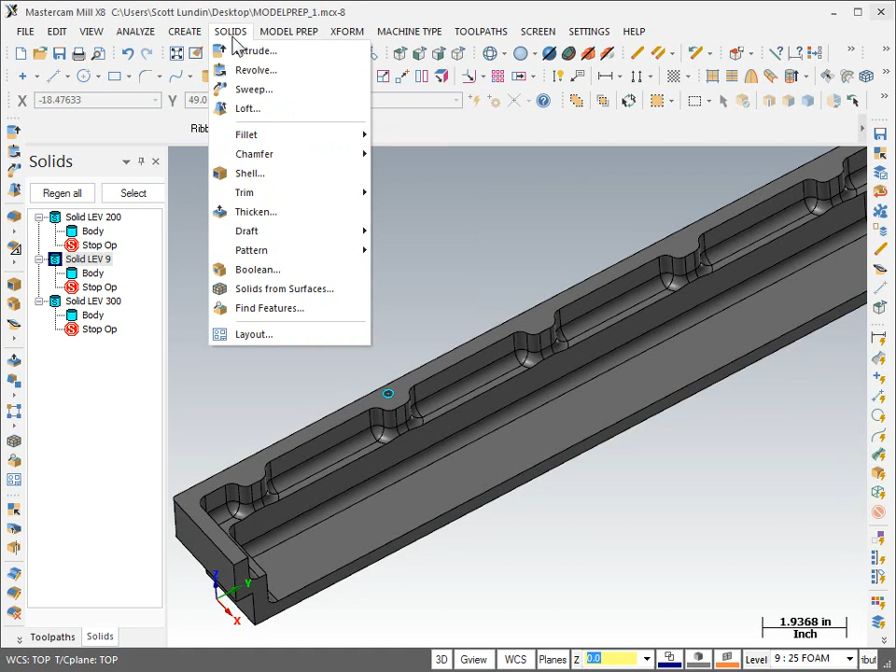This part came in and the customer basically wanted to move this circle and this boss with all the radius over an inch or whatever distance. I'm going to show you how to do that. I've created a few different levels: his original part is on level 9, and I made copies onto level 200 and 300 because I'm going to show you a couple different strategies. The first one on level 200 will probably fail, and then I'll show you how to get it to work on level 300.

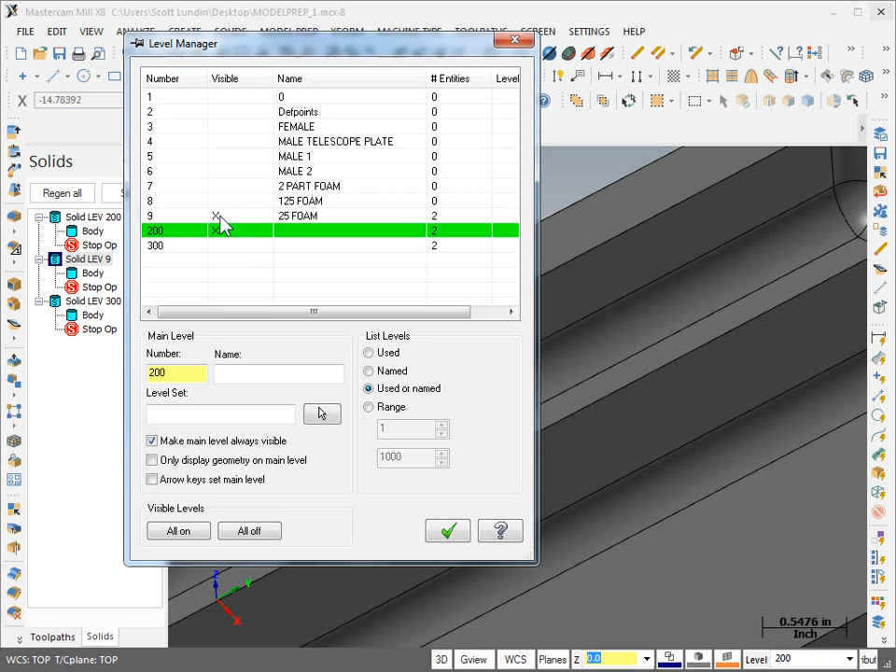So I'm going to make 200 the main level and turn off level 9. We'll OK that. What we need to do is get this boss separated from this top face. In a perfect world that's all we'd have to do, and we could move the boss and the hole together. But it may not work so easy on this part because we've got some funny radiuses going on down here.

At any rate, I'm going to draw some helper geometry—a line from this corner to this corner. You notice as I touch that face, that's one face, the skinny part and the boss. We need to split that.

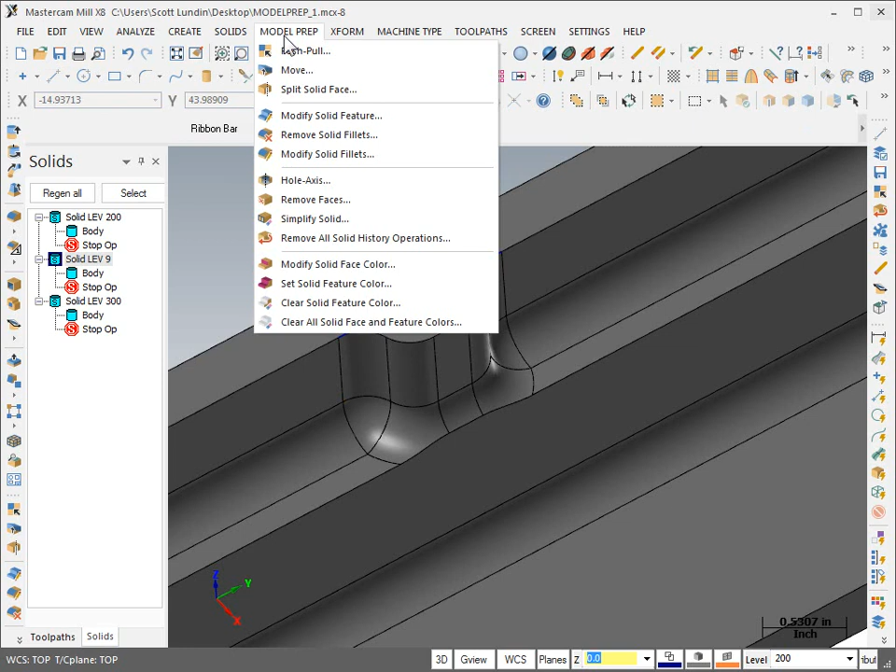So that's where we go up to Model Prep and use Split Solid Face. It asks you to pick a face and some geometry, so I pick this face, and to pick that blue line it won't let me right now. I have to go up to the main menu and turn off the face button, since those solid selection icons aren't on right now. Now I can pick this edge, and that's it—it's split.

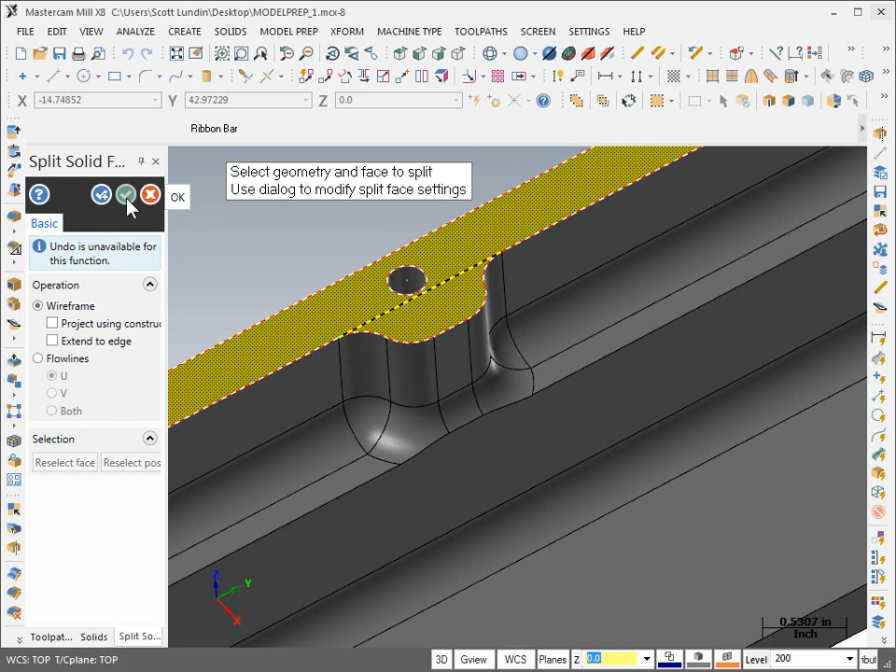We hit OK here, and you notice I touch that—that's one face going straight across, and this is a separate face. So technically now this boss is separated from that face.

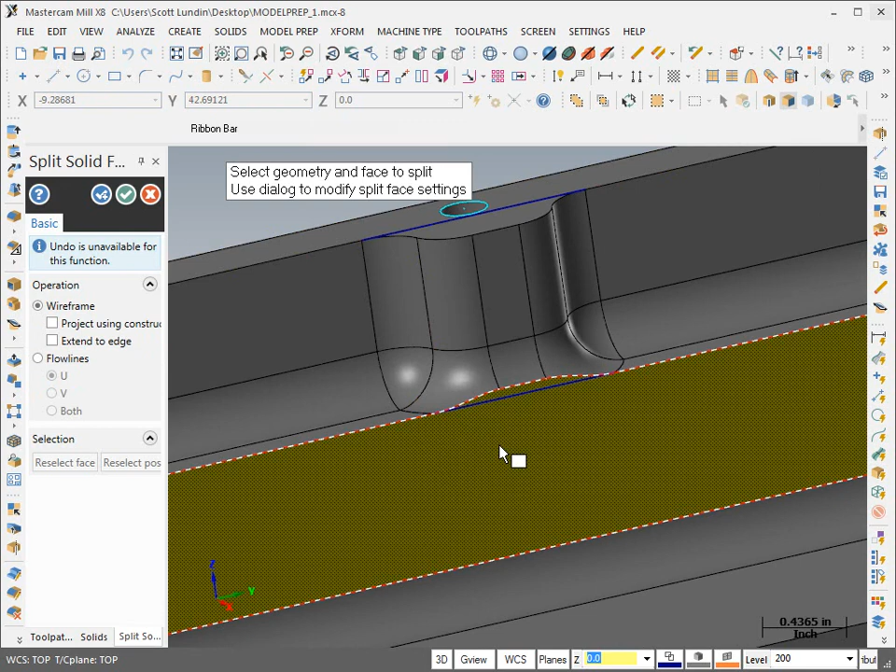Now there may also be one down here that we have to separate. So I'll draw another line from here to here, and do the Model Prep Split Solid Face again—this face, turn off the face button, this edge, OK. As I zoom in now, there's one little tiny face that's different. They are separated now, so the boss, all the way around, is separated.

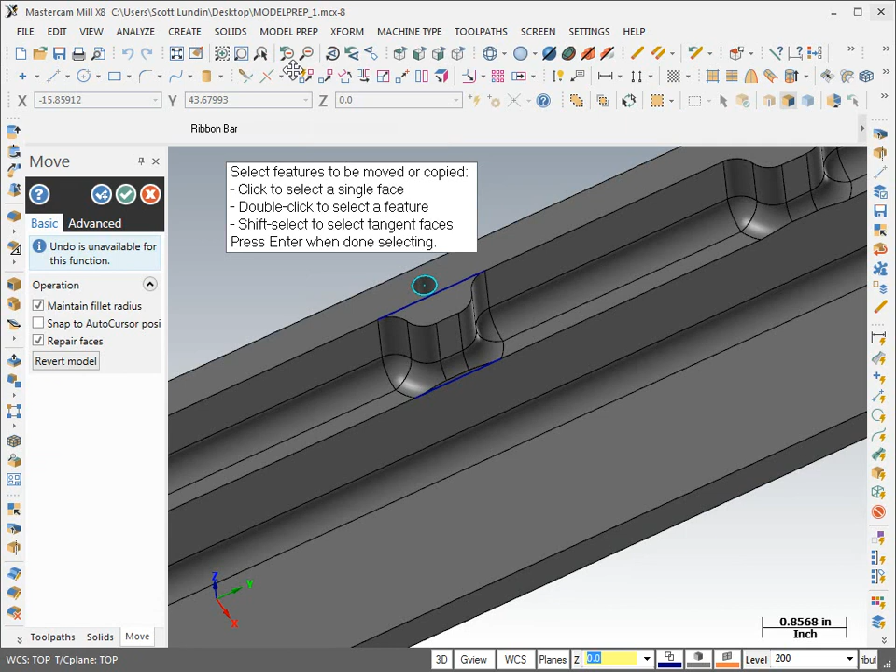So now perhaps we can move it. One way to do that would have been with Model Prep, Move. It tells you to pick your surfaces, or faces I should say, and then hit Enter.

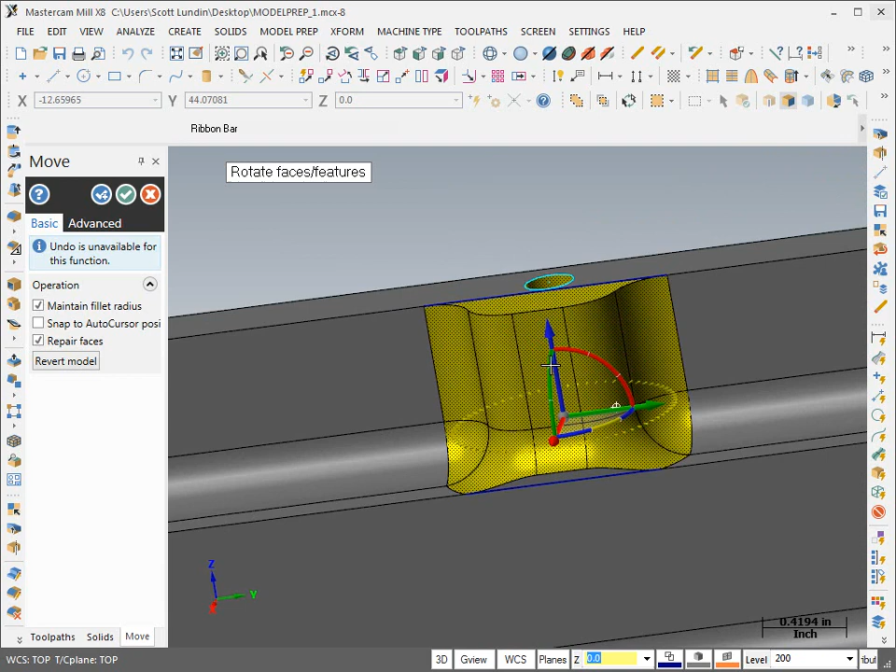I'm going to pick the cylindrical bore, and also this top face and all of these faces—careful not to click on the clock dial yet. It looks like I got all those faces picked, and probably also this one, because I want to take all of that and move it over.

Now right here is this little icon, the symbol for moving geometry. If you click on it, that's the symbol for just moving the axis indicator only. I do want to move the geometry, so I click on that.

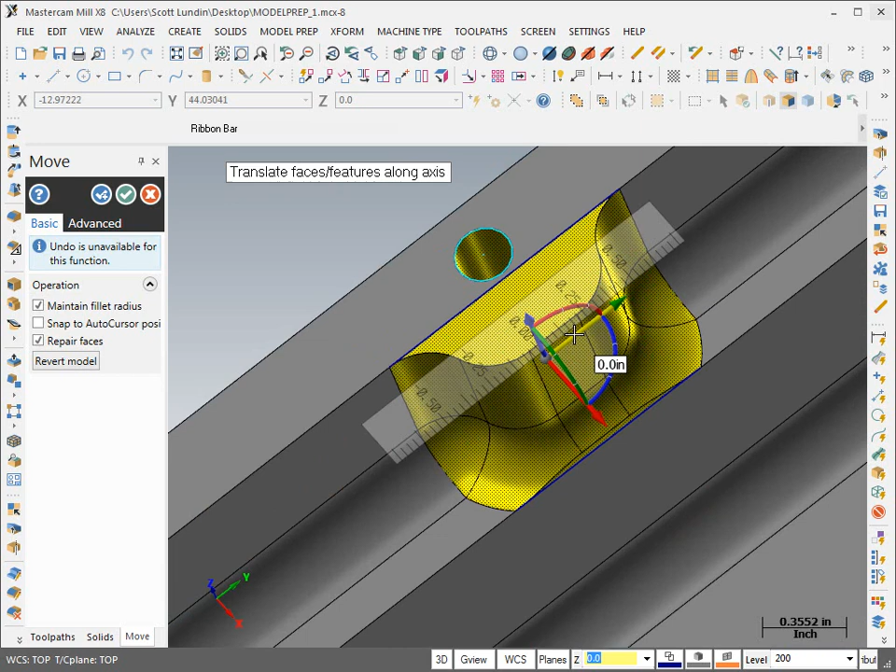To move the geometry, all I have to do is click on the green stem and put my mouse into the face. You can see as I'm moving, the hole is moving but the boss is not. I'll take it up here to 1 inch. So the hole moved, but the boss didn't.

So in a perfect world that would have been the way to do that, but since that's not going to work, I'll do it a little bit differently. To start fresh and clean, I'm going to forget about level 200 and go to 300, and turn off 200.

So, doing this a little bit differently—first of all, it's these radiuses that are probably causing the issue of it not being able to move. I'm going to need to delete these radiuses, then I can move the boss, and then I'll have to rebuild the radiuses. So first I need to know how big these internal radii are.

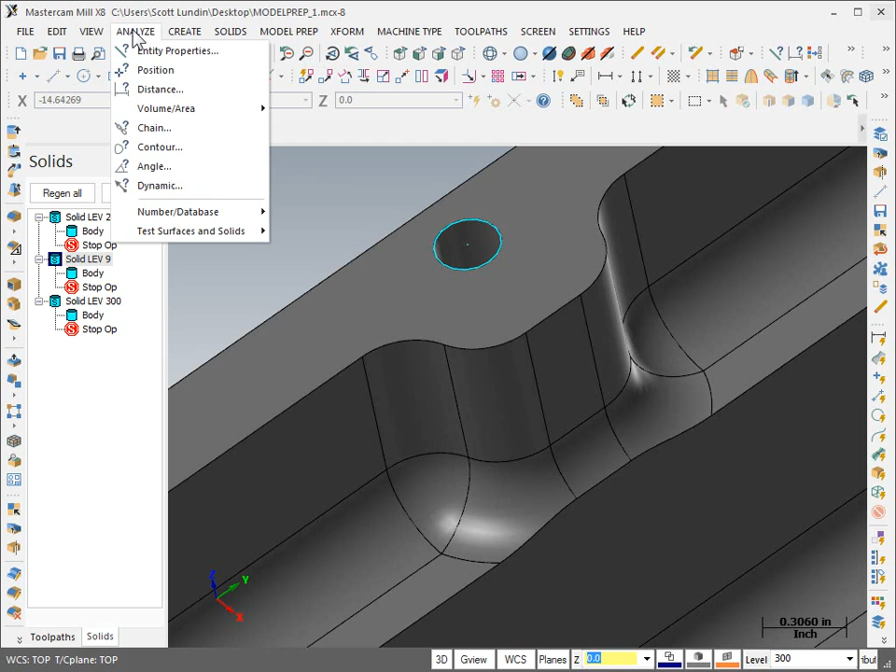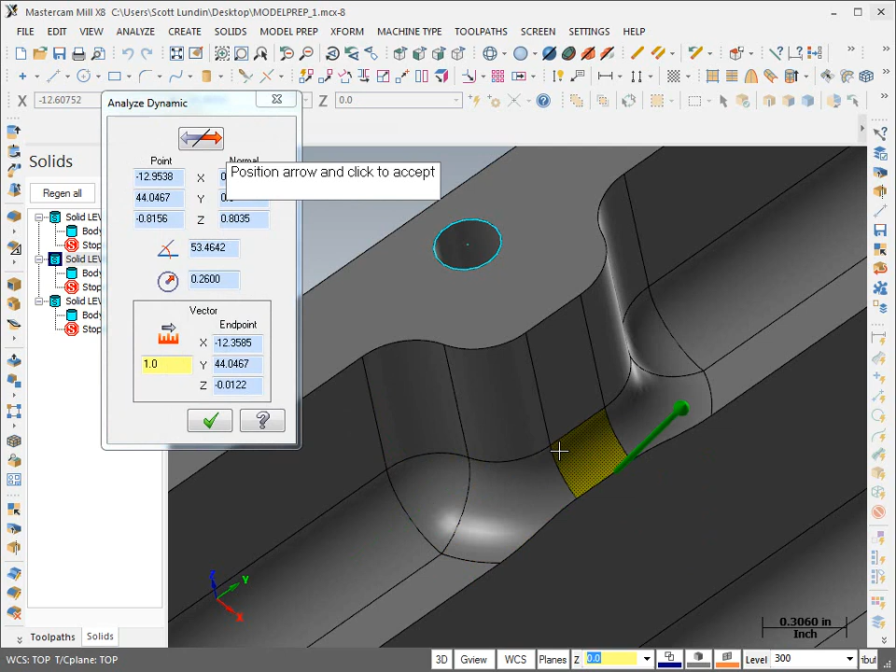I'll go up to Analyze Dynamic and click on this face here, pulling the box over so you can see—that radius is 260. Clicking on this face twice, as I move it around, again you can see that's a 260 radius. Clicking on this one, 260, and another 260—so these are all 260.

Another 260 and another 260. Okay, so just keep that number in your mind. We're going to need to know that later.

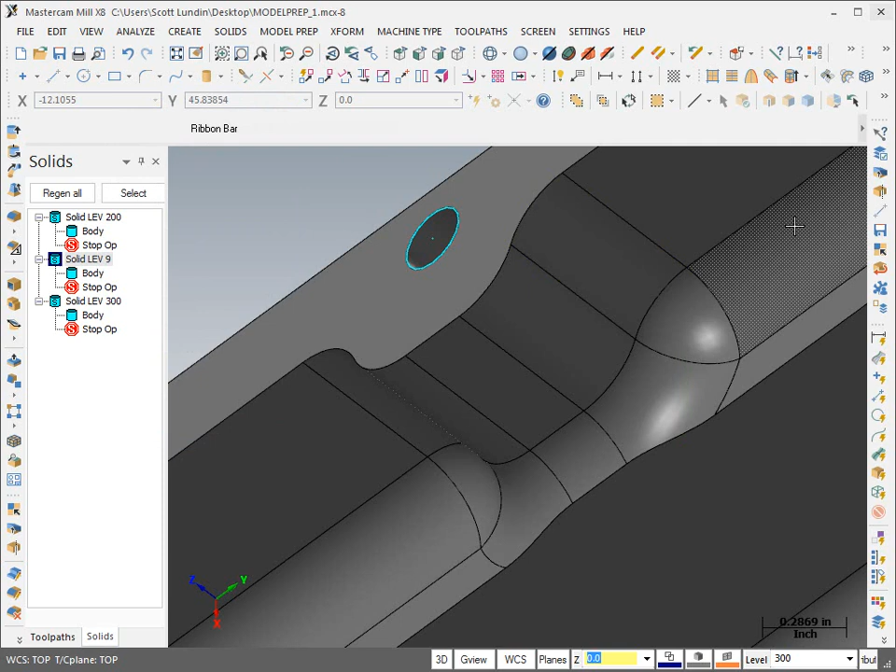So I'm going to escape out of Analyze. The next thing I want to do is remove these radius features. Under Model Prep, there is Remove Solid Fillets, which you might think would do the job, but I tried that. It doesn't work, so we tried a different method. We're going to use Modify Solid Feature.

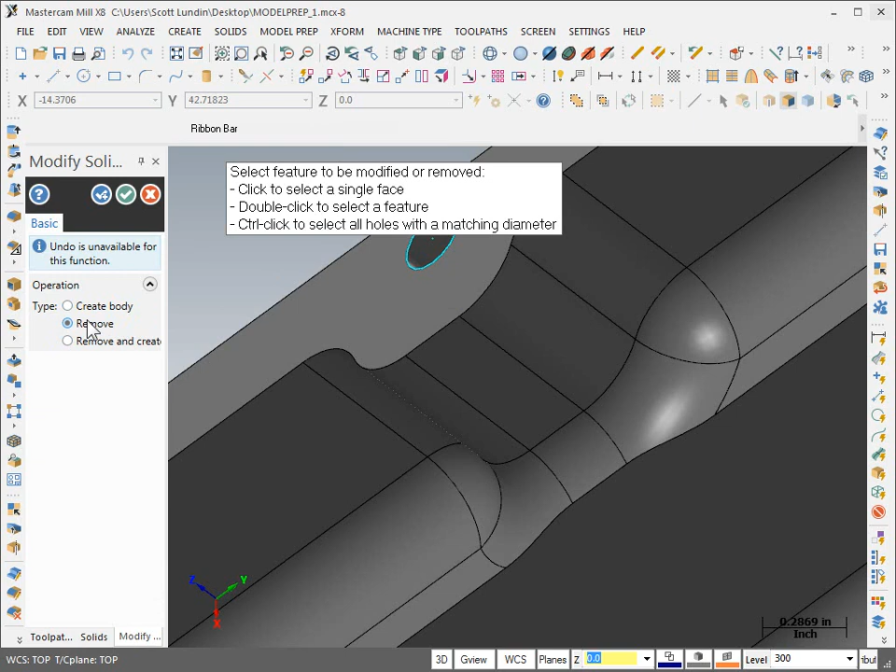What we can do is set this box here to remove, and then go around and click just the inside radii. This one, here, and here, and here, and here, and here, and here. I'm just going to hit OK. So now we've removed those radii.

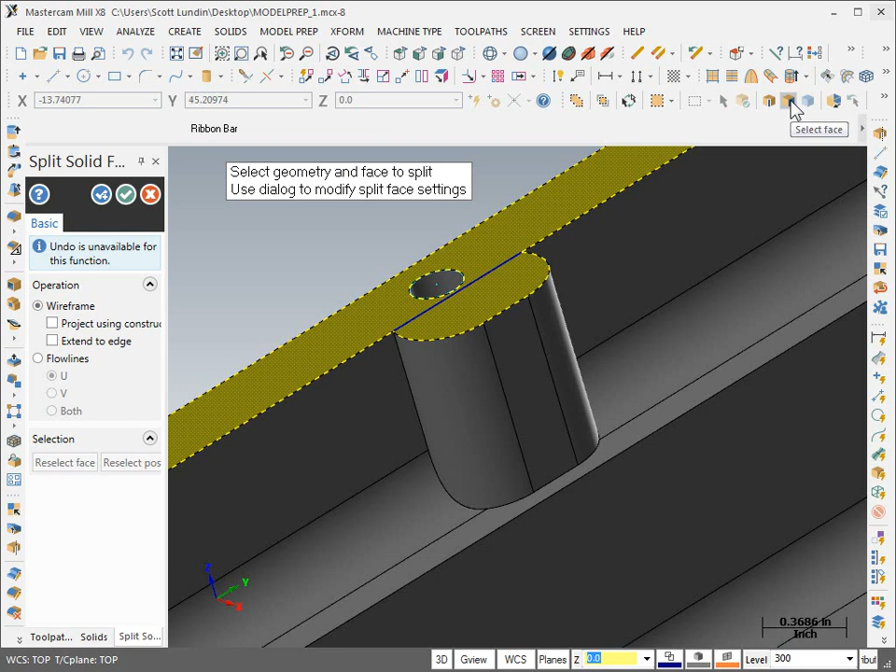So the next step now is we're going to split this boss off. We're going to do the split face thing that we did earlier. I'm going to draw that helper line again, this time from here to there. Then we'll go up to Model Prep, Split Solid Face. I'll pick this face, and again, to get that edge, you have to turn off this face button up here. Pick that edge, and when you hit OK now that's one face, that's another face.

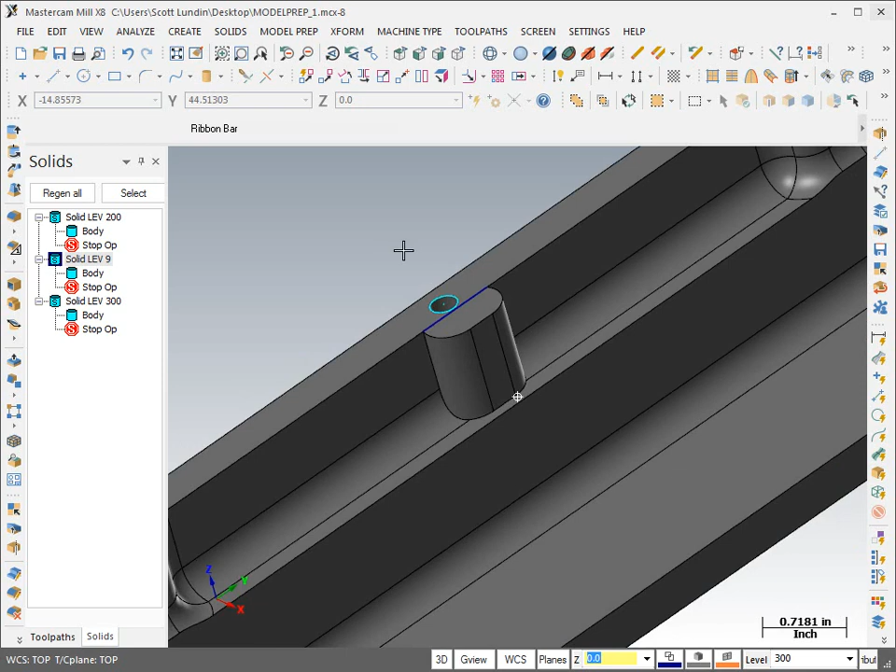So the next step now is, since we got rid of all those radiuses and we split this, I believe we can now move the hole and the boss together. Again, I'll go up to Model Prep, Move, and I'm going to pick this inside circular face, cylindrical face, top face, one side, other side, in the center. So I've got all of the boss faces picked plus the cylinder.

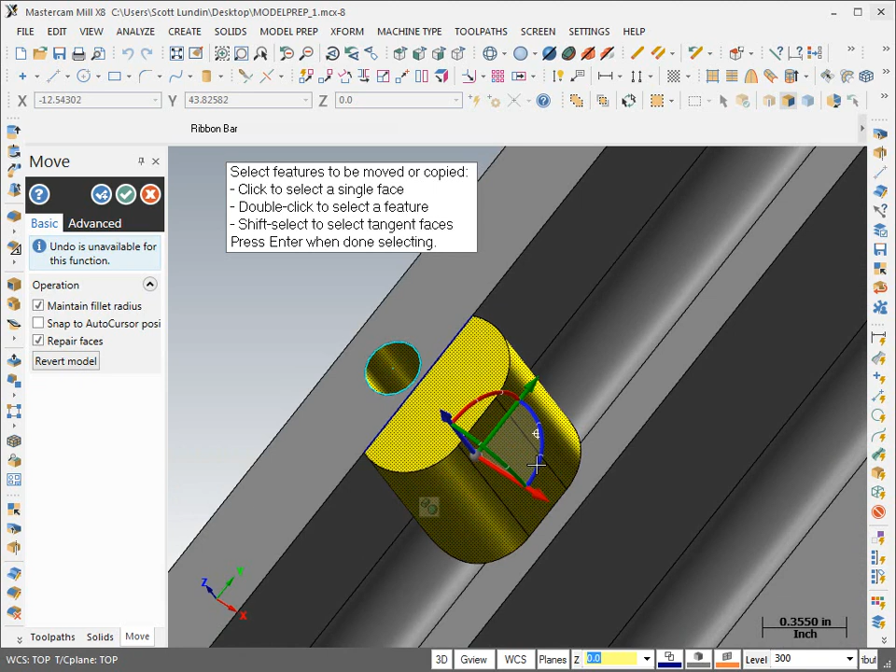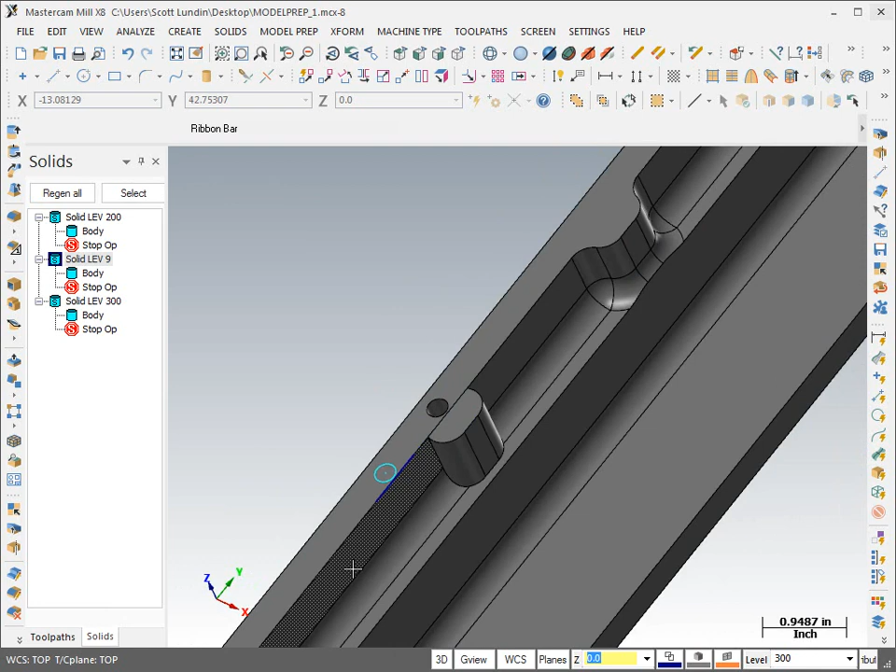So now this is already in the Manipulate Geometry mode, so I should be able to carefully click on the green axis line, move over to the scale, and as you see now everything's moving together. I'll take it up to 1 inch, click on that to lock it in. OK, I'm done. So we just moved this hole and the boss 1 inch.

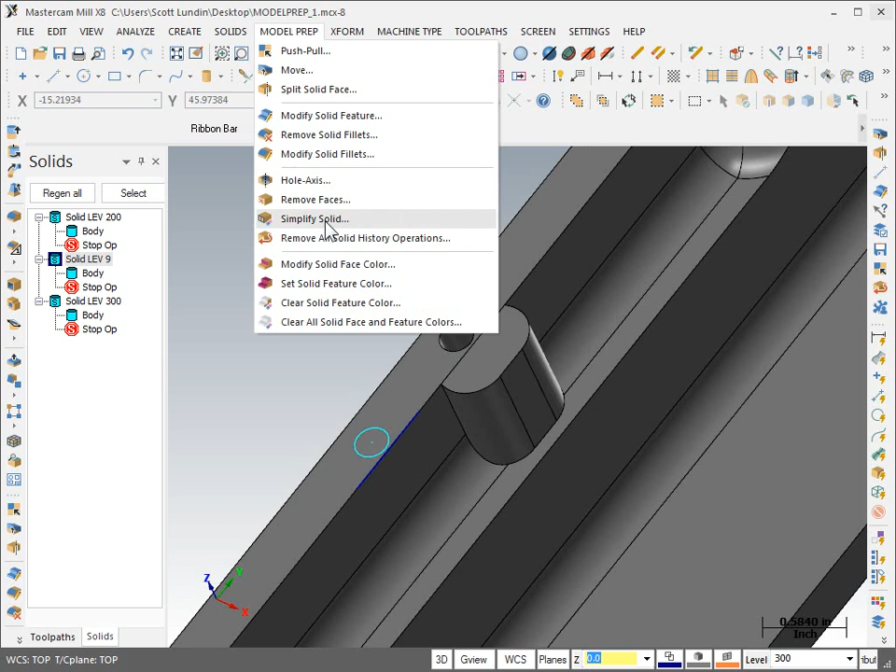The wireframe's not going to move. That was just there for reference, and it doesn't need to move. So now we got to put the fillets back in, and I want to get this and this back to being a single face. So what I'm going to use is a command called Model Prep, and I'm going to use Simplify Solid.

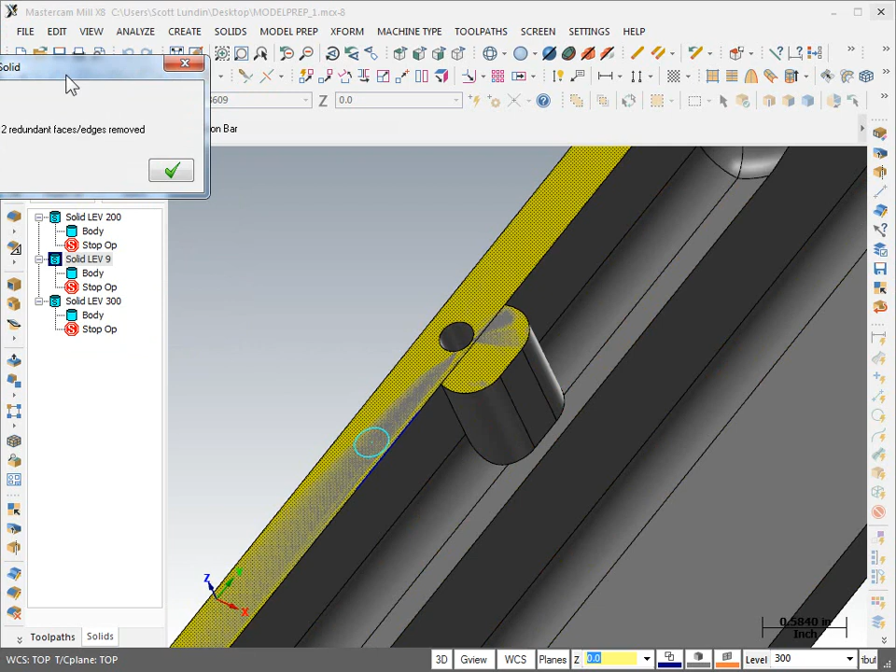It asks me to pick the solid body, so the body button is on here. That white, that's a face. Move the mouse a little bit. There's my 3D cube, so I click on that. That picked the entire solid model, so when I hit OK, it tells me that 2 redundant faces and edges have been removed. Okay, so now you see as I touch that, that's one single surface again.

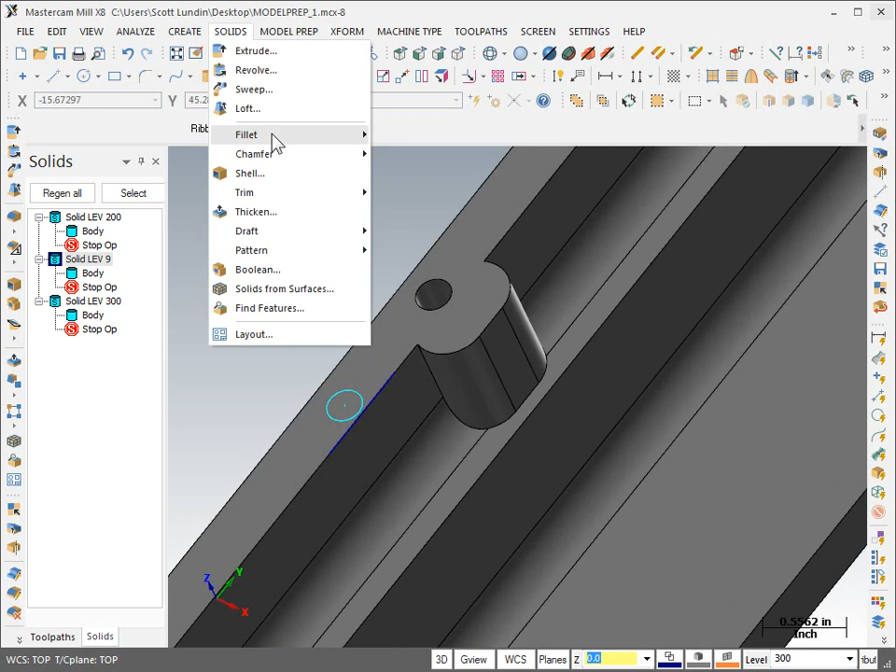Now I can add the fillets back in again. Instead of Model Prep, I'm going to just go to the standard solids menu, and I'm going to say create a fillet, constant radius fillet. In this window, I'm just going to make sure the edge button is on, the other ones are off. And I'm just going to pick this one vertical edge. That's all I need. OK that.

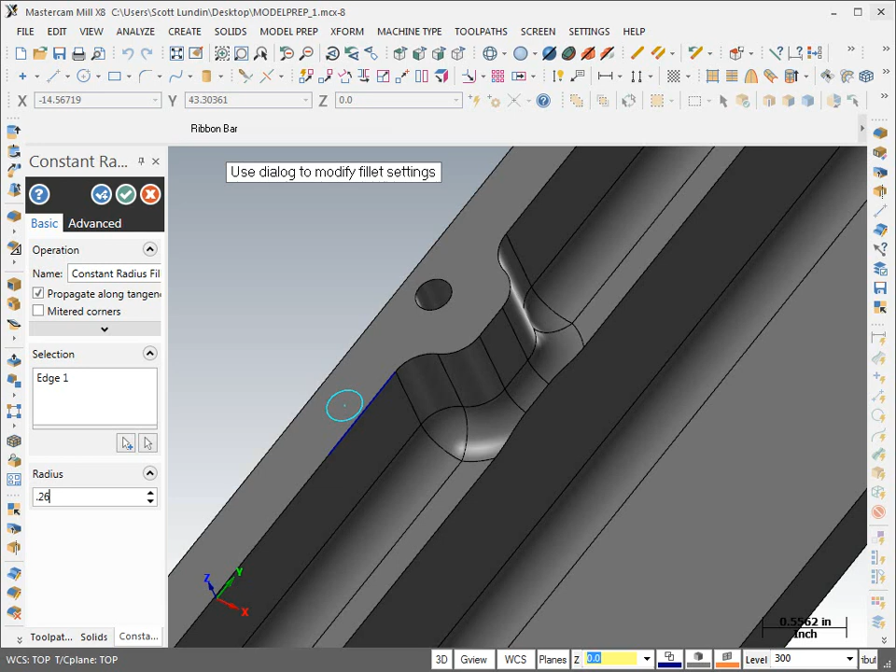And propagate along tangencies was already on. That's why it propagated all the way around. You can type in whatever radius you want, in this case 0.26, enter. And it looks pretty good.

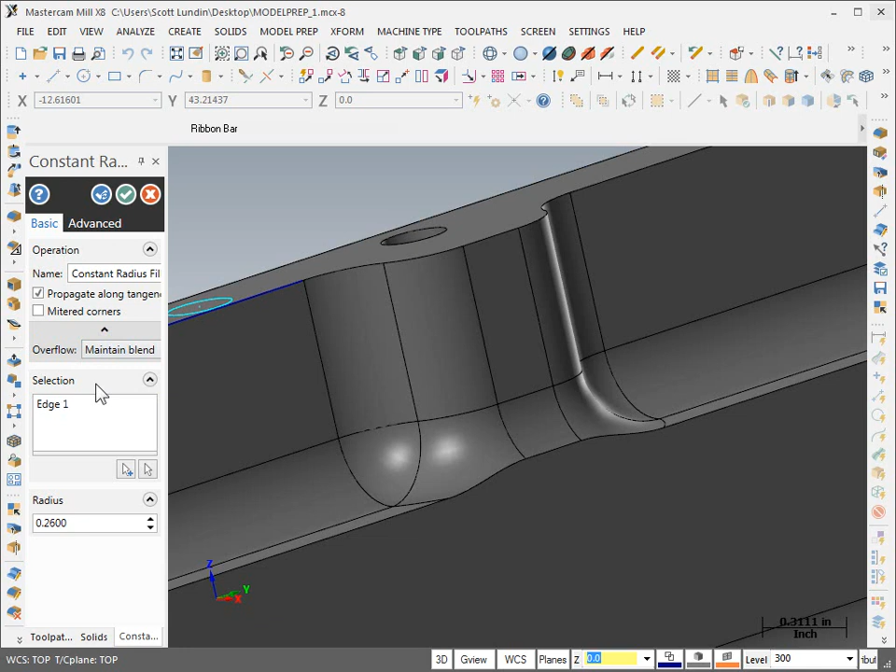Now, one other thing about, let me go back into the parameter for that constant radius fillet. There is a drop down arrow here. The reason that worked is the overflow was set to maintain blend. The default is just default, in which case notice that the fillet maintained this edge and it modified the top edge.

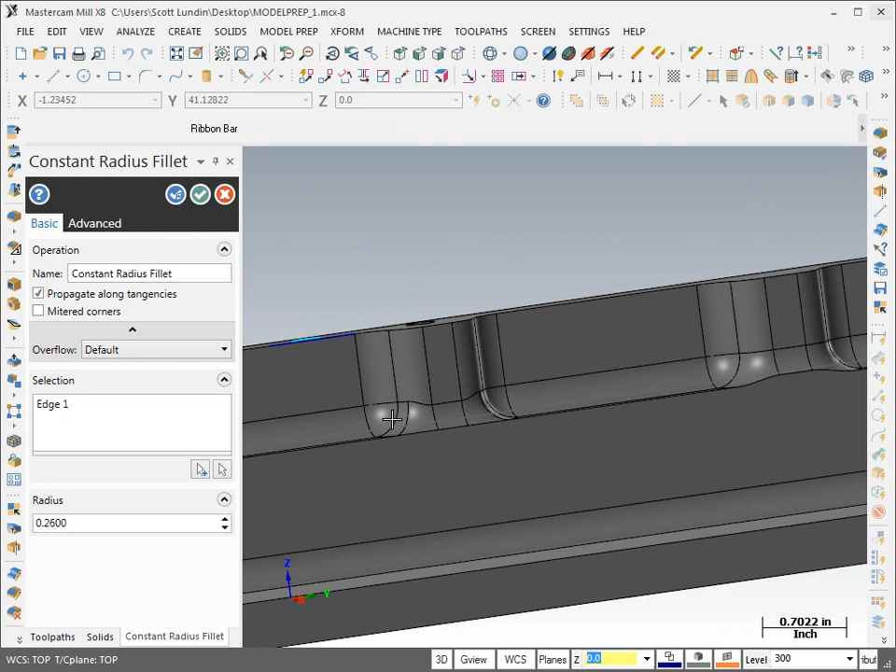Well, that's not what we want. As you look at the other ones, the original ones, they're maintaining that fillet off of this edge, letting this one vary. And that's because the distance from this face to this face is less than the radius - it's less than .260. So you've got your two choices there.

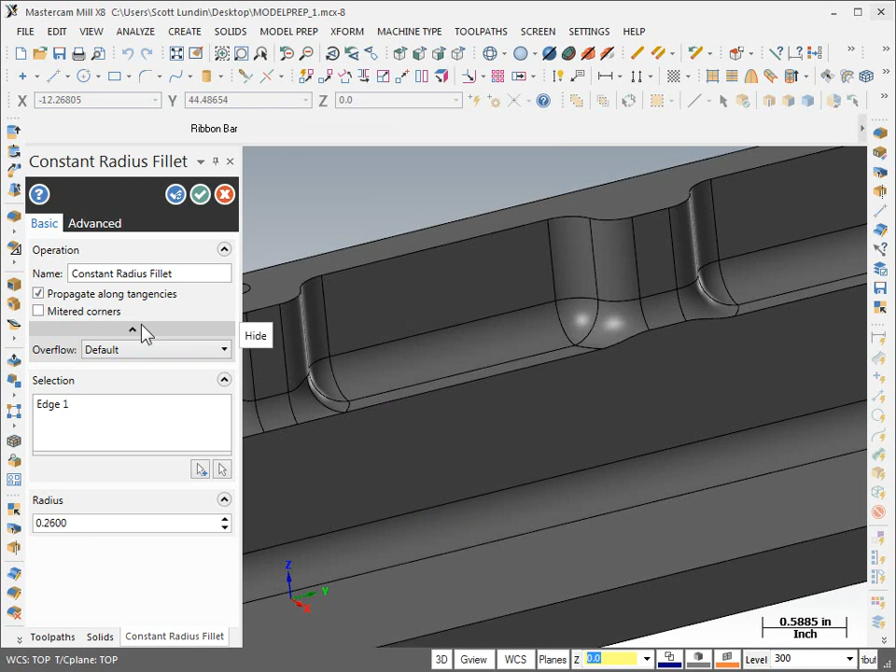And this is what everybody overlooks - that little arrow there, typically that's hidden like that. So you just got that little drop down arrow to bring that up. So hit this, hit maintain blend, and you can see how that radius now flipped up.

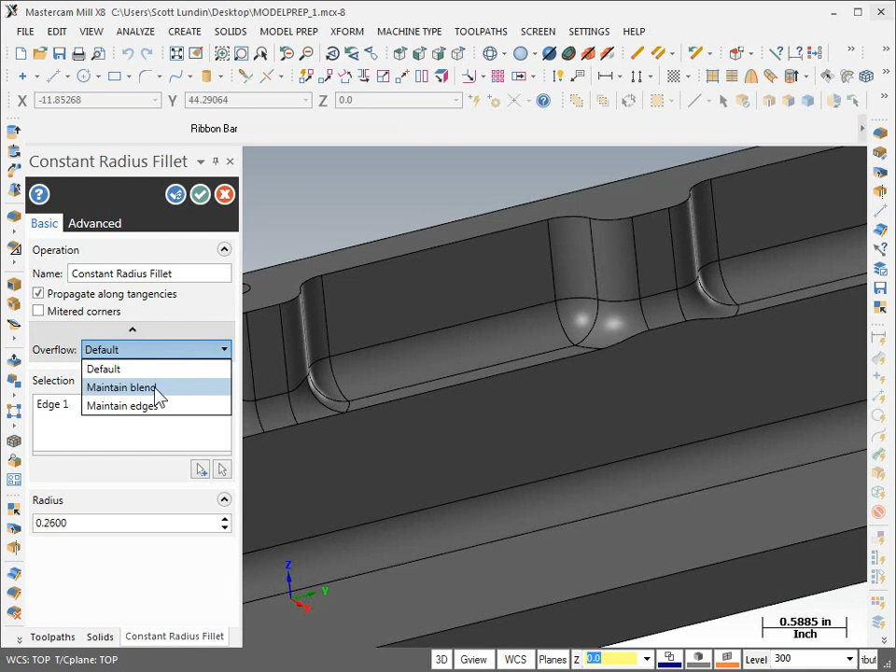I'll just do it again, back and forth a little bit. Default, it's flat across the bottom. Nope, don't want that. Maintain blend, and there it is. So that is a way to move that. It's a few more steps, but it can be done. That concludes this video. Thanks for watching.